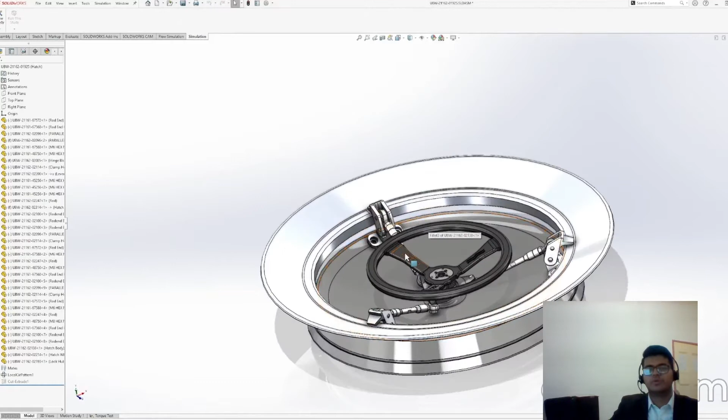Hi and welcome to SolidWorks 2022 simulation. SolidWorks Simulation 2022 adds new capabilities that simplify analysis setup, improve performance and increase the accuracy of your simulation. The internal frame of the Nemo personnel submarine contains a large number of bonded contacts. Solving time for this geometry is now over 25% faster than Simulation 2021.

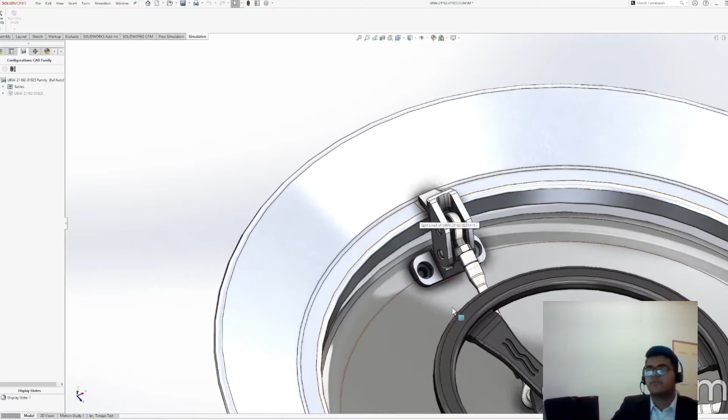The Nemo submarine utilizes a specialized handwheel to secure the hatch while diving. Engaging the latch fingers requires a minimum of 500 Newton of contact force. This would ensure almost any passenger is capable of applying enough torque to properly seal the craft. Taking advantage of cyclic symmetry by cutting the model to 1/3, we will save setup and solve time.

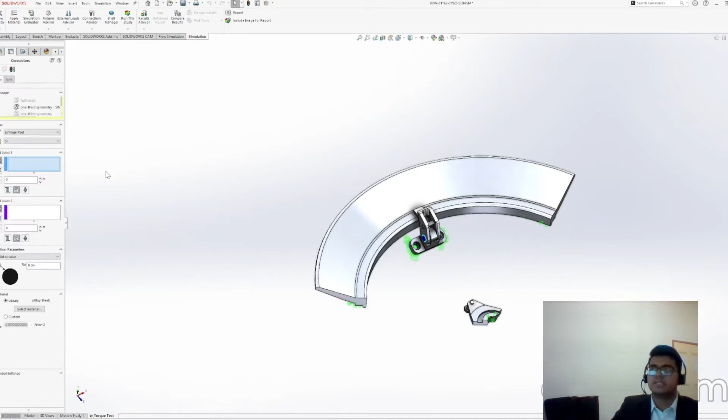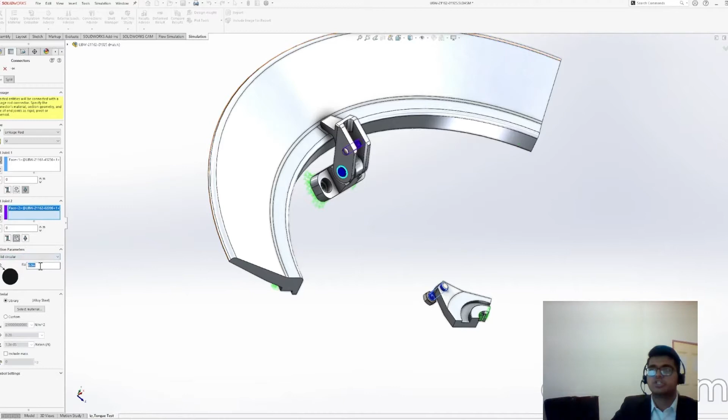The model can further be simplified by removing a tie rod and replacing it with a new type of virtual connector. The linkage rod connector accepts either cylindrical faces or vertices to represent the rod ends. The end condition can be defined as fully rigid, pinned, or even spherical. We will select the cylindrical faces and spherical end conditions to properly simulate the function of the tie rod. We can even choose from several cross-section shapes and define section dimensions.

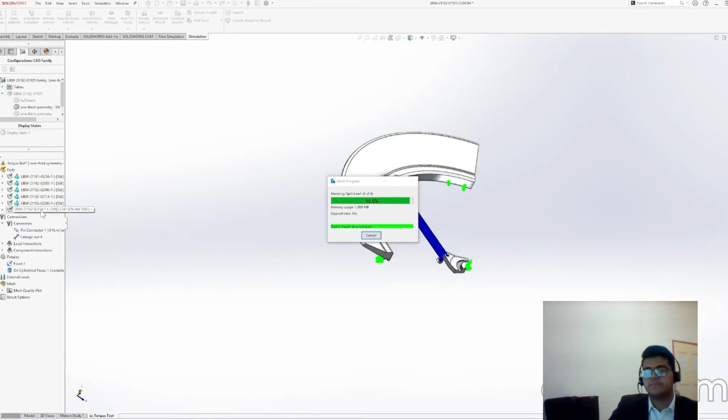SolidWorks 2022 now defaults to the powerful blended curvature-based mesher, which can now accept mesh control values outside of the maximum and minimum global size range. This means you can refine portions of the mesh in any region without limitation, helping you reach the optimum balance of solve time and accuracy. As you can see in the following figure, I have applied mesh control on different regions to optimize the balance of my solving time and make the model more accurate.

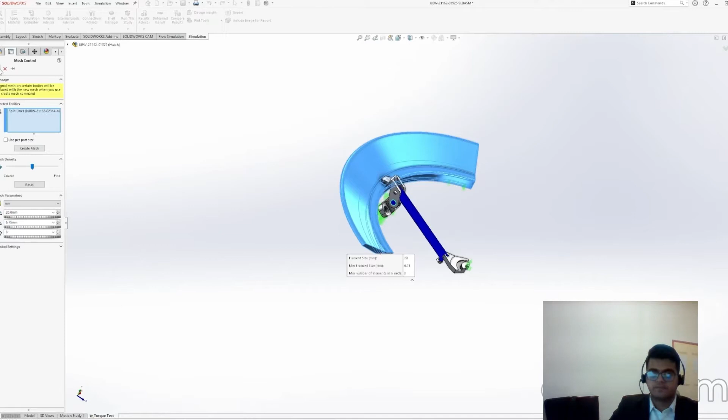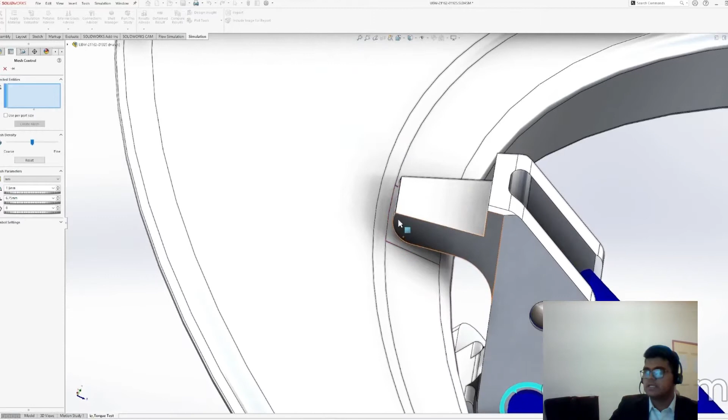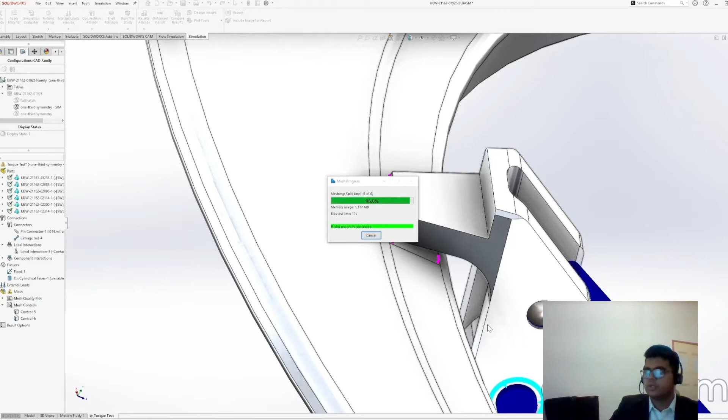Now I'm going to apply the mesh control between the connectors to make it more refined. As you can see, I can simply select the connecting surfaces and apply the mesh control with the element size. Press done, and I'll just go and run the mesh again. Usually remeshing doesn't take long. So just quickly remesh it again, and there you go. You can see the refined meshing between the connected surfaces.

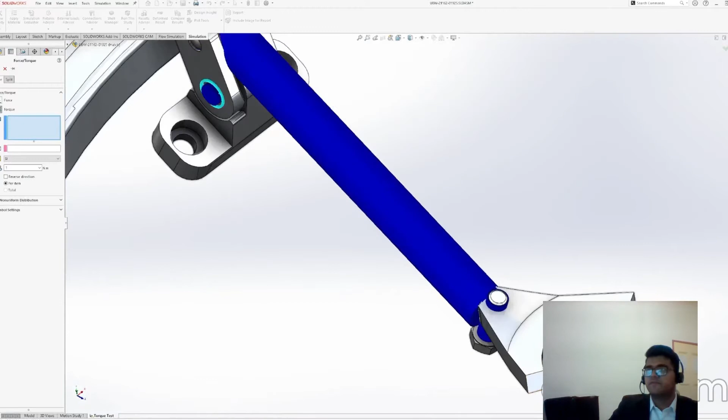Now the next step is we'll apply a torque to the center rotor. The fifth percentile of humans can apply 16.5 Newton meters of torque to a steering wheel of this size. Since we are analyzing a symmetric model, we will cut that value to 1/3.

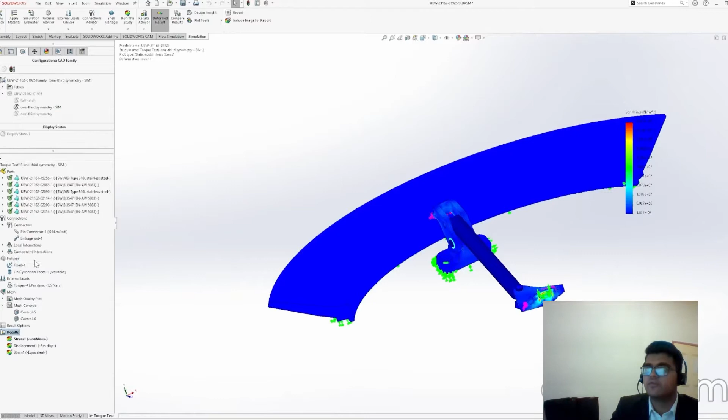After running the analysis, we can review shear, axial and bending loads of the virtual linkage rod, as well as solve for the contact reaction forces developed between the latch finger and hatch flange. To determine the contact forces, I'll quickly go through the results, list result forces, and select the contact friction force between the two contacting surfaces. And then you can find out the resultant force. Multiplying this resultant force by 3 gives less than 500 Newton, which is the requirement for a properly sealed hatch. So the design needs to be changed.

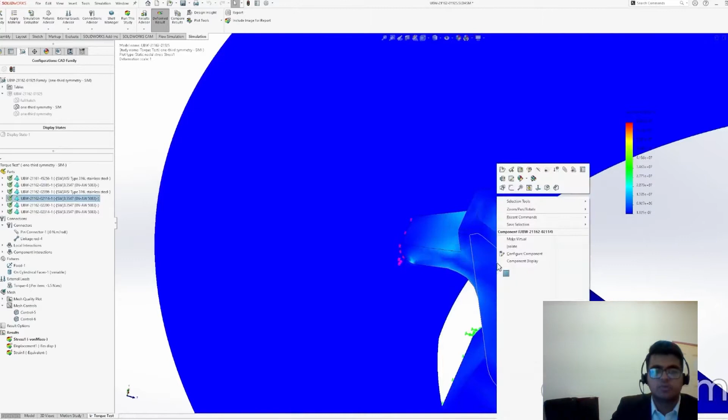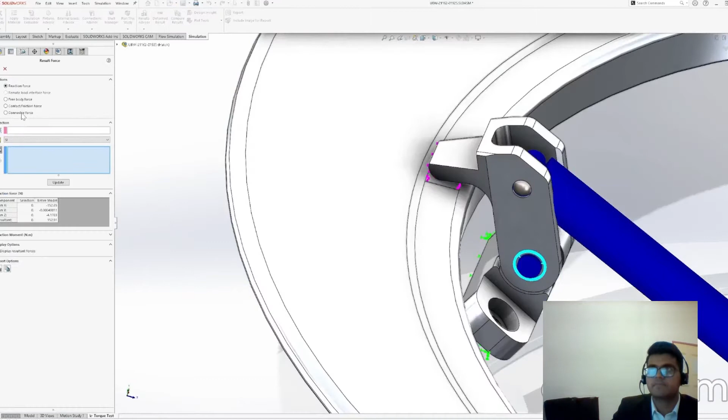Let's try moving the connecting rod attachment 10 mm further away from the pivot. This should add additional contact force without requiring additional torque. So I'll just go again with the results, resultant contact force between the contacting surfaces. Success, 211 Newton. This small change increased the contact force by 38%. We are now safely past the 500 Newton minimum.

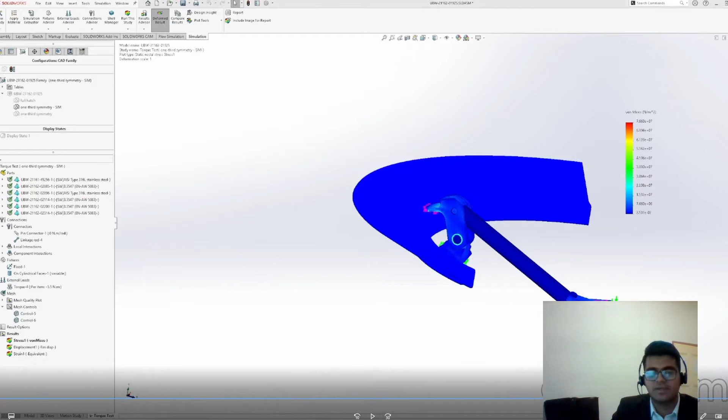SolidWorks 2022 adds new functionality that refines the setup process and provides under-the-hood enhancements that speed up performance and increase solution accuracy.

When collaborating with others while performing design work focused on facilities, often you need to share your design data using an alternative file format like IFC.

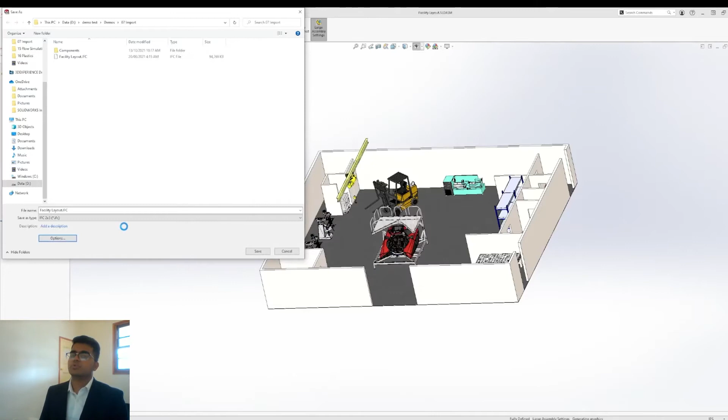SolidWorks 2022 has focused on improving both the efficiency and reliability of saving the IFC file formats out for other design tools to leverage. Additionally, 2022 has improved its flexibility when reading the IFC files as well. Now, when you open an IFC file, you can choose to filter the specific object types to import, avoiding the need to open unnecessary geometry and focus on just the information you need to work with.

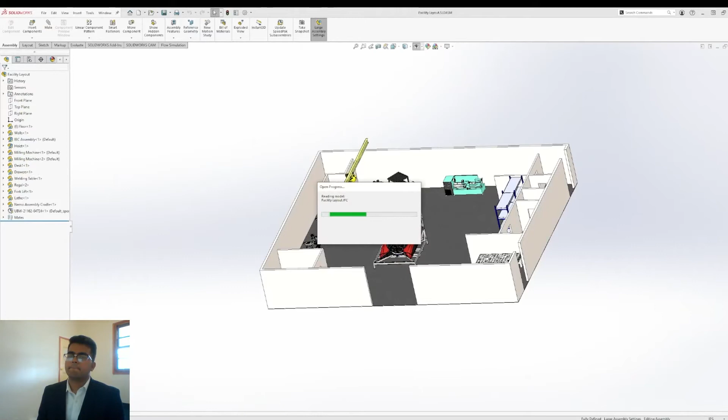For example, your task may only require the walls, floor, and the furniture within the building, as we are selecting in the following video. All of this means the imported files both open faster and do not contain overly complex geometry for the specific design. As you can see in the figure, it's not taking a long processing time to open the IFC files, and it's only showing the specific information which we have chosen.

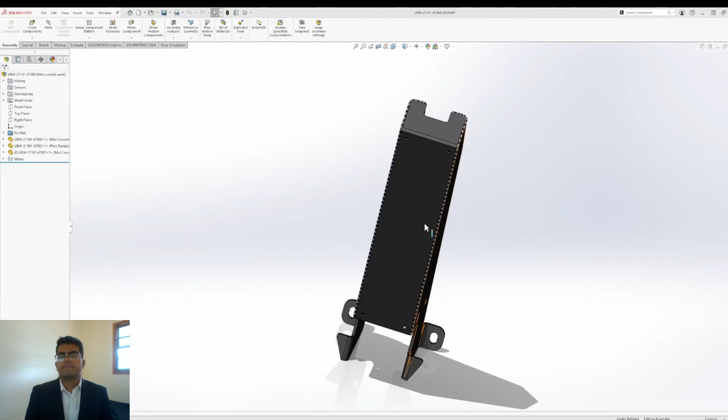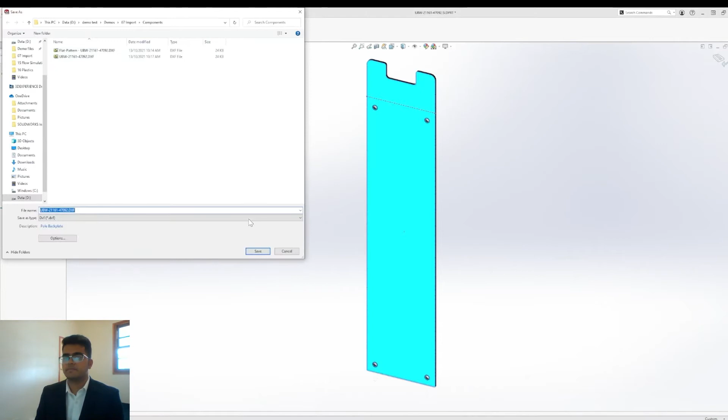Also, the new SolidWorks 2022 has better support for the DXF and DWG file formats from the part file. Components often contain color information that is important for manufacturing processes, such as the color of sketches, bend lines, and other information. Now, when exporting to DXF and DWG from the part file and enabling these objects to be included, their color will be honored in the output files.

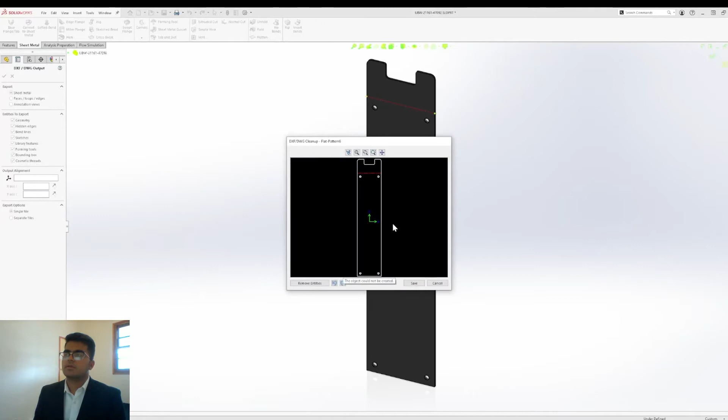This is extremely valuable for downstream operations when color can represent different manufacturing processes or parameters for NC tool equipment. While going through the design process, cosmetics and appearances change regularly. Understanding and updating these changes should happen regardless of when or how we open our files. So let me change the appearance of these components of the demo assembly.

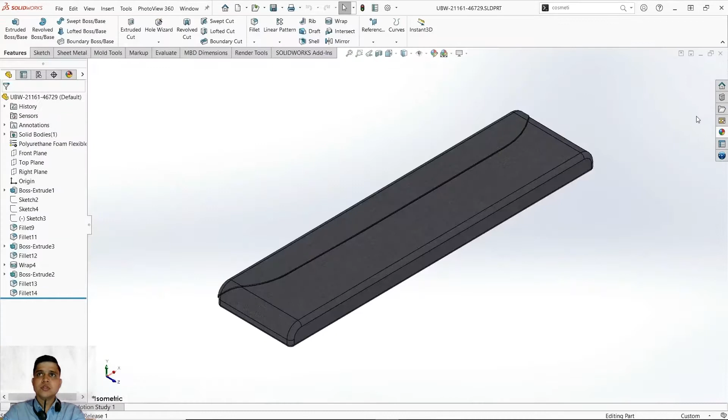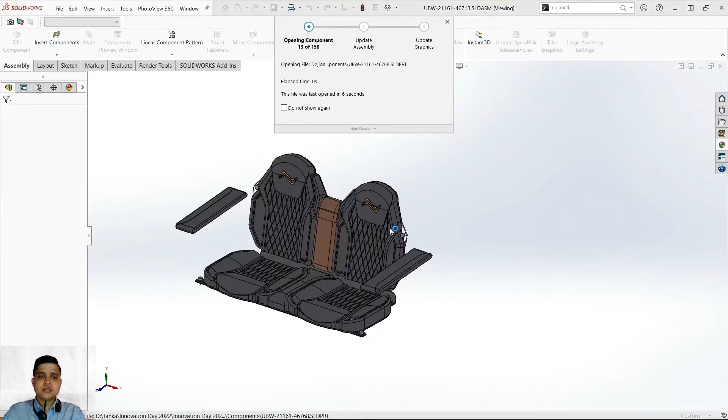Let's do one more. And SolidWorks 2022 ensures that the appearance of components is correct and updated. This is achieved by automatically resolving lightweight components that have a graphical or appearance update, regardless of whether any features have changed since the components were last saved, as you can see on the screen.

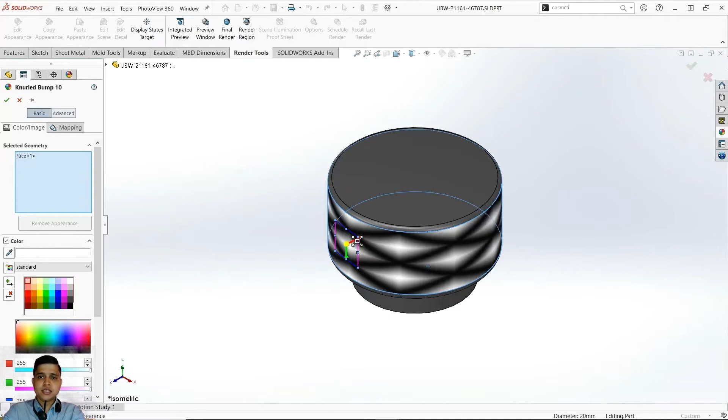The previous version of SolidWorks introduced a unique simplified way to create complex textures by leveraging unique appearances on faces, bodies, or components. Textures can be created on those surfaces to generate complex geometry without any hassle. Now, SolidWorks 2022 delivers increased performance and responsiveness when creating these complex and highly detailed textures. As a result, you can apply them more without sacrificing performance.

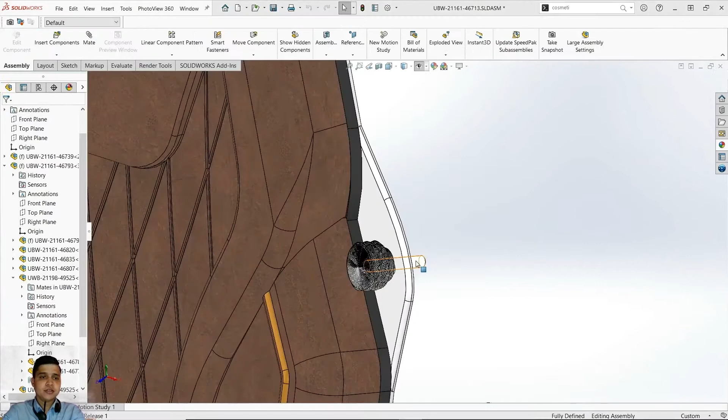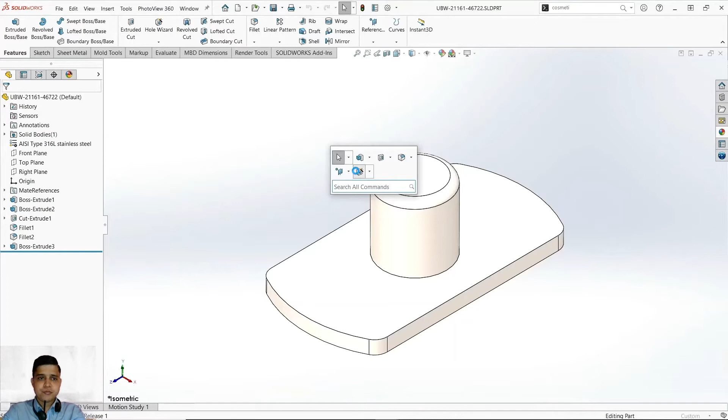SolidWorks 2022 introduced texture-based cosmetic threads. These cosmetic threads not only look great, but also make it easier to spot the components which have threads. These threads will be used for any type of feature that includes cosmetic threads, from manually created threads to the new stud feature, and of course to the Hole Wizard, as you can see on this feature.

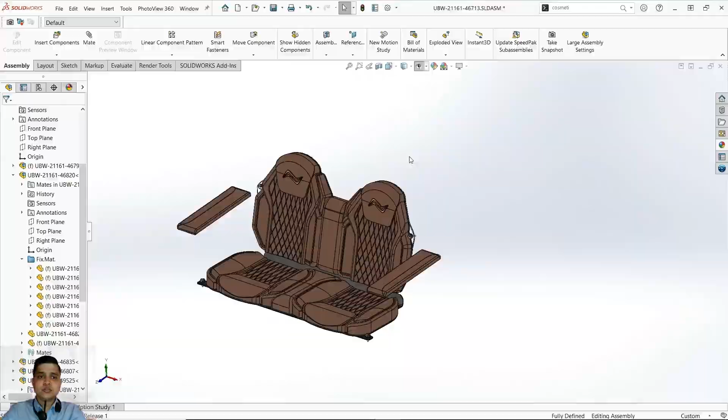Finally, performance is always critical to saving us time. Let me unhide this, and yes, performance is always critical to saving us time. SolidWorks 2022 has increased the frame rate when rotating parts and assemblies with silhouette edges by over 10%, saving you time on every single zoom, pan, and rotate.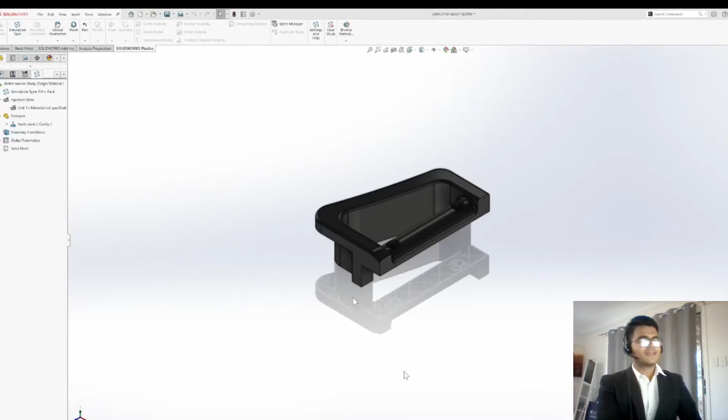Welcome to the new SolidWorks Plastics. SolidWorks Plastics 2022 adds new features and horsepower to solve more complex problems with greater ease. This plastic cover is bolted to two hoist hooks on either side of the hatch. Since it has an asymmetric design, both the right and left-handed versions are required for the Nemo submarine. We'll start by adding a material to the plastic injection analysis.

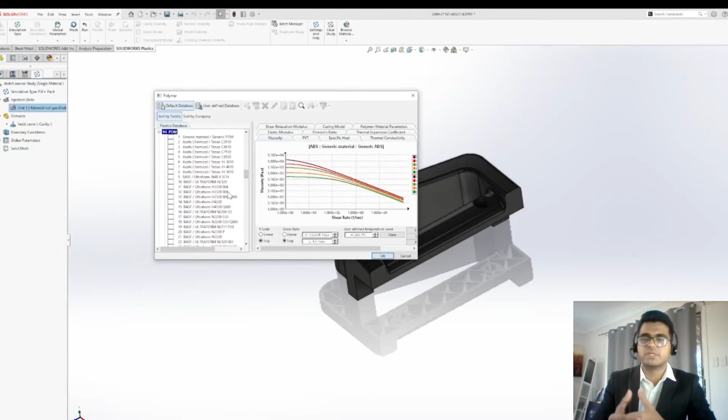The material database is the key to any plastic simulation, and this year we have added 100 new material models and updated over 1500 materials to improve the fill, pack and warp accuracy. For this part, we'll choose a Delrin material. The new injection location advisor gives us immediate feedback on where to place the injection point. It even automatically solves for the optimum pull direction based on your geometry.

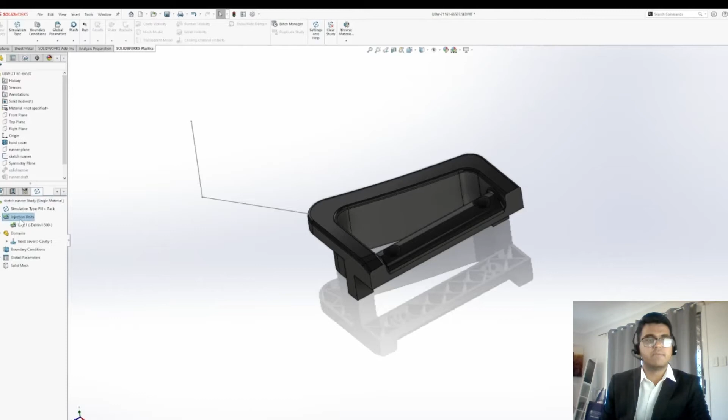But for this model, we have decided to go with a sketch-based runner using the updated simplified runner tool. Just click the sketch segment and choose the dimension. The new flip dimension button makes it even easier to build your custom runner, and now there is no need to define the number of elements for each segment. It's computed automatically. As you can see in the following figure, I'm just adding the dimensions for the runner system, and with that flip button I can just interchange it.

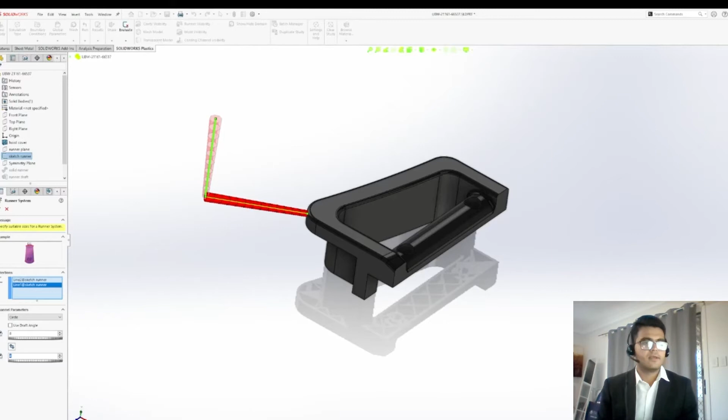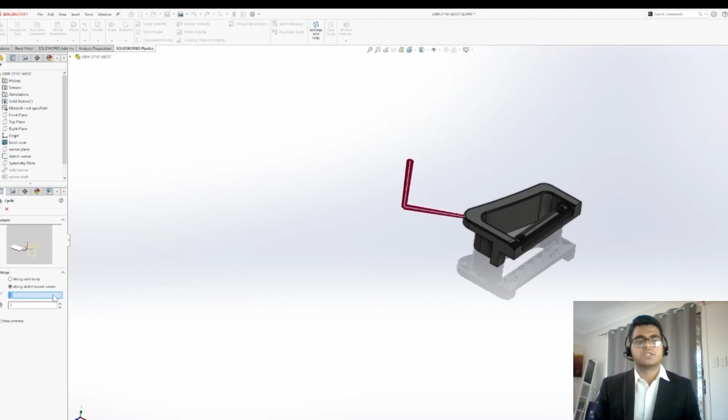Perfect. We need a family mold to create cavities for both the right and left-handed components. In Plastics 2022, we can use the new symmetry boundary conditions. This will create a virtual opposite-handed cavity in one step. Simply click on a plane that cuts through the sprue, and the new cavity associated with the runner will be there. But what if you need a family mold with multiple cavities for the same part?

The new cyclic boundary condition allows you to create additional virtual cavities in a circular pattern. Just click the center, the sprue sketch line, and the number of cavities you want, and you're done.

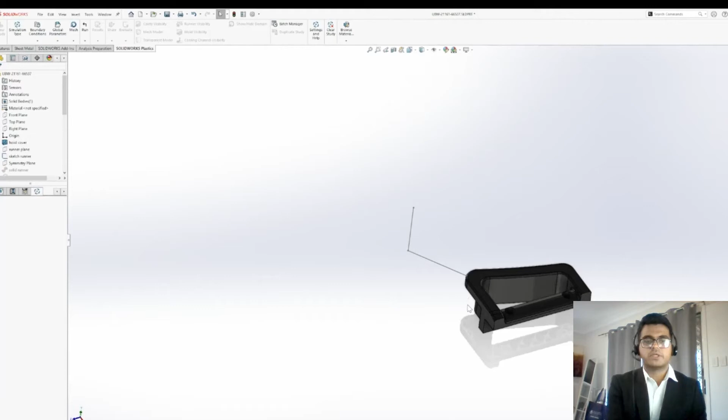And of course, if you choose to model your runner system using the solid geometry, both the symmetry and the cyclic boundary condition can also be used. When it comes time to solve the analysis, the new run button is only a right click away from the top of the tree.

And when analyzing your fill, pack, cool, warp studies, turning on the symmetry option allows you to visualize the full virtual cavity.

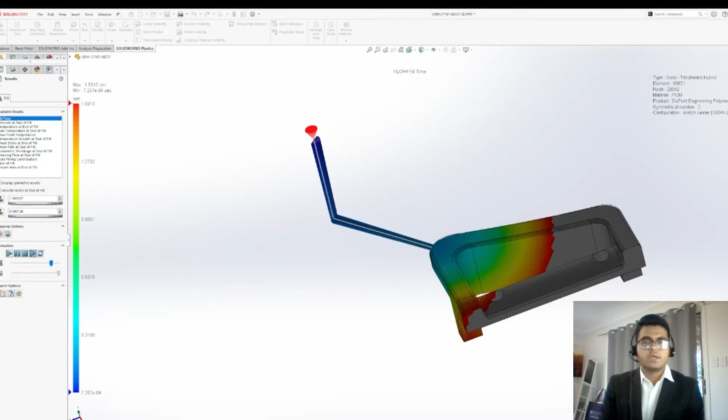Actually, my CPU is crunching some time because there are few applications running in the background.

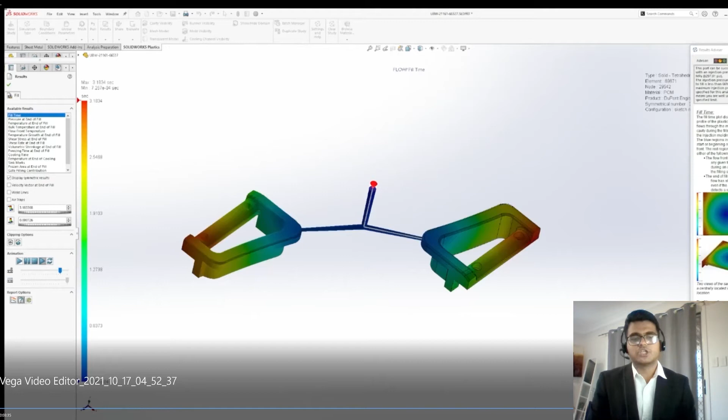Okay, so SolidWorks Plastics 2022 combines additional functionality, simpler pre-processing, and powerful automation to get accurate plastic injection simulation results faster.

Whether we are working with in-house or clients manufacturing, quality assurance is key to ensuring consistency with our products. Let's see how SolidWorks Inspection 2022 simplifies and automates QA operations. The major change in SolidWorks Inspection 2022 is it supports NX files and the much anticipated SolidWorks drawing file format as highlighted in the video just before.

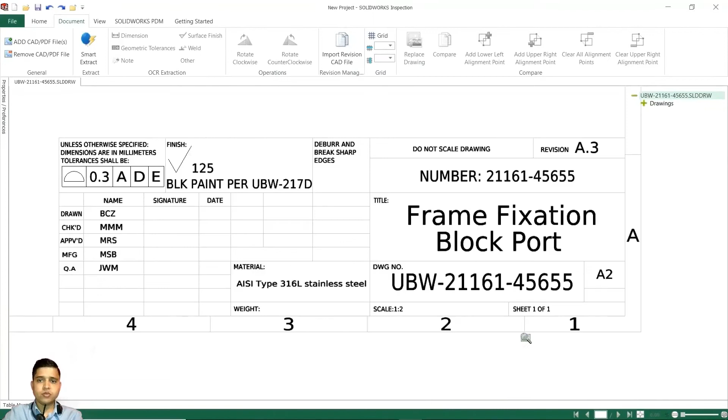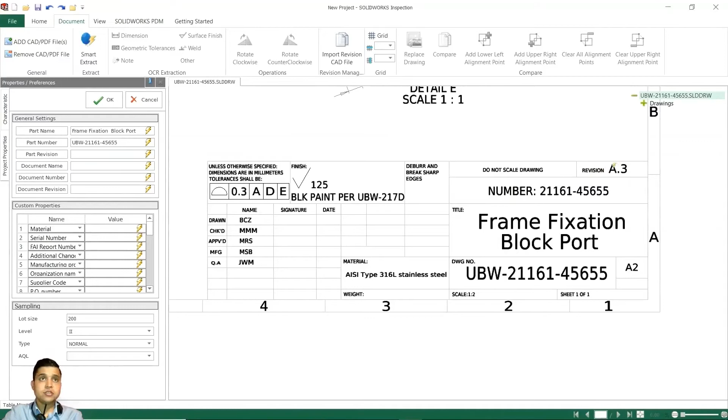Now we can start the project with the standalone application where we can directly import the SolidWorks drawing, then extraction of required part information such as description, part number, and revision is simply a click. The same smart extraction method is used to collect dimensional and tolerance characteristics as required for the report.

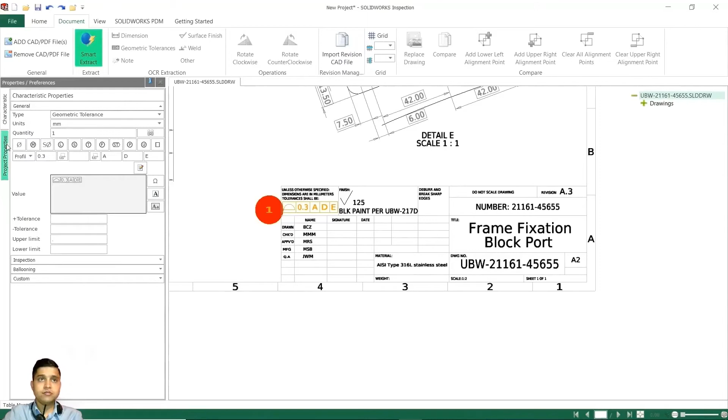An additional surface profile tolerance note is ballooned and extracted. You will see SolidWorks identifies GD&T symbol precision and geometric tolerance indicators, which will all be carried downstream into your first article or in-process reports. Continuing through the extraction process, hole callouts and geometric tolerances are ballooned and remapped to the project's bill of characteristics.

Investigating balloon 5, which is home to multiple dimensional requirements, SolidWorks Inspection automatically identifies each and has broken them into two sub-balloons, 5.1 and 5.2, as shown in the table. Repeating these simple steps for the required tolerances and dimensional callouts is a breeze. No manual data entry required.

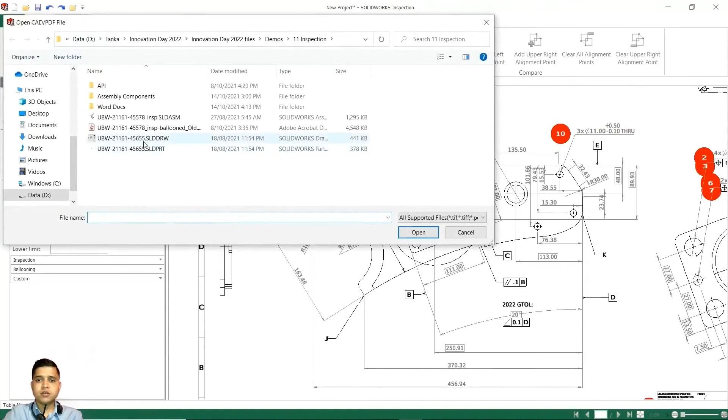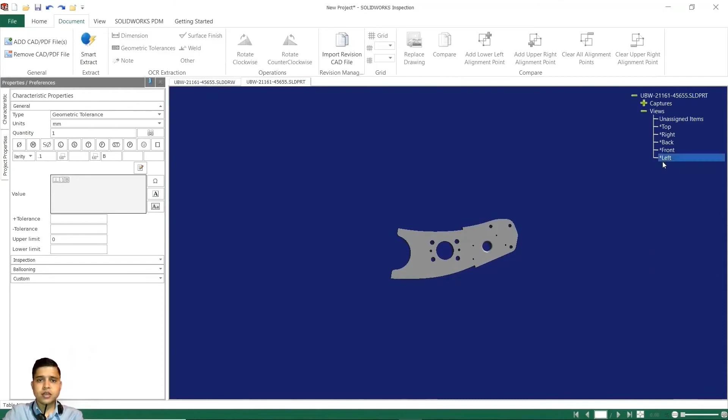Let's say, what if we want to use a 3D part? SolidWorks Inspection 2022 has dramatically upgraded the support for SolidWorks part files. So let me add the 3D part directly into the inspection project alongside the current 2D sheet. So this is our 2D sheet and this is our current 3D part file. The extraction process of geometric tolerances and positional information is the same as in the 2D drawing, but now ballooned under 3D parts. As you can see, I will be ballooning those 4 bits.

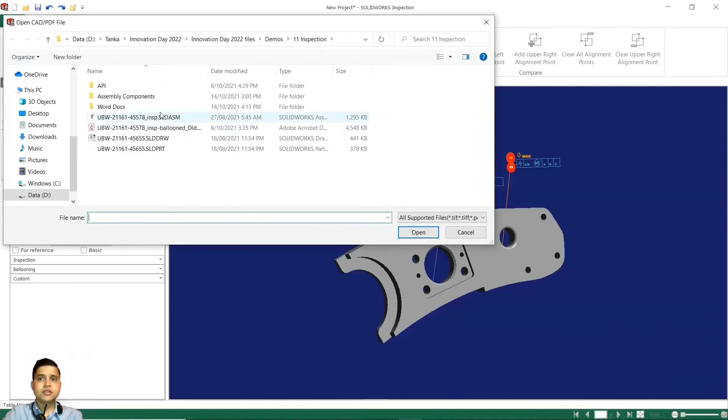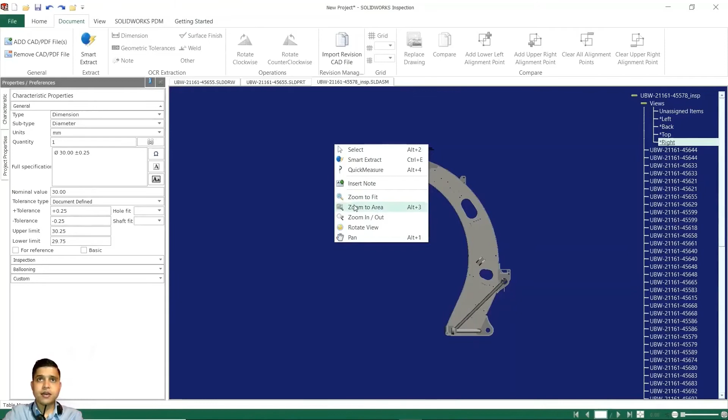During the assembly of this bracket, a few critical welds along with some surface finish requirements are also required to be inspected. Inspection 2022 now fully supports importing SolidWorks assemblies to ensure proper fit, form and function with all manufactured and assembled items. With the bill of characteristics created, this package can now be saved. Let me extract those 3 tolerances and geometrical data.

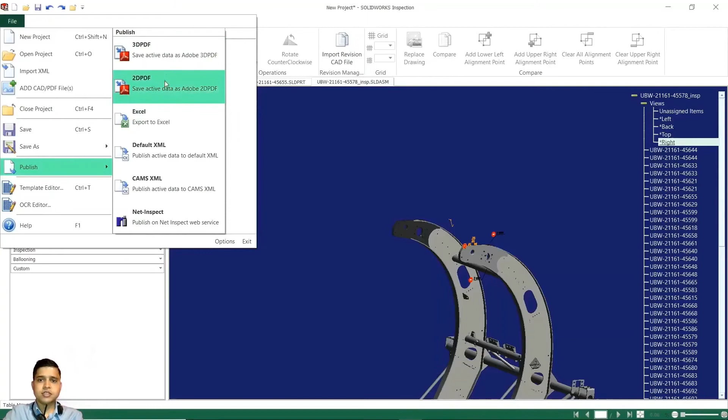So now it can be saved or published with all the associative 2D and 3D data without having to access any of the drawings, parts or assemblies inside of SolidWorks CAD. The inspection report can be generated and include both 2D and 3D PDFs along with the necessary Excel documentation. And that Excel documentation, as you can see it.

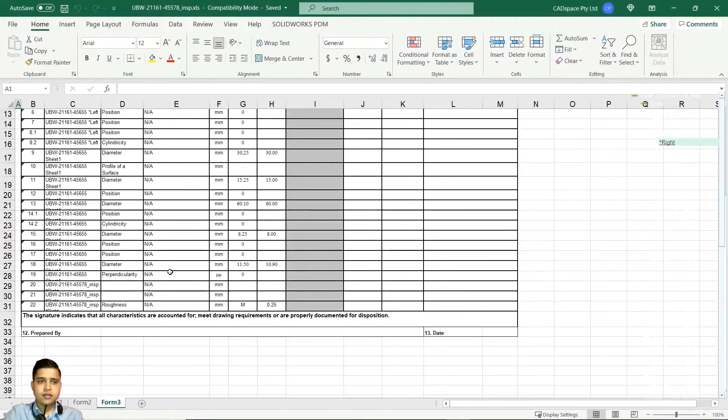SolidWorks Inspection is also available directly inside SolidWorks itself as an add-in. New in Inspection 2022 is full support for API, which can be found in What's New SolidWorks 2022.

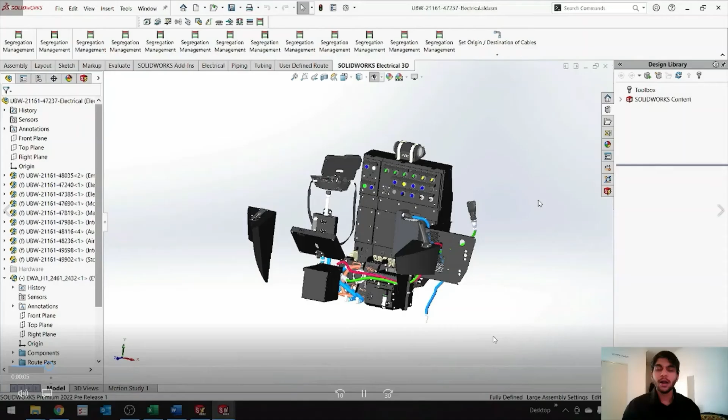In any mechatronic system, electrical design plays a very important role. And in SolidWorks, we have brought multidisciplinary engineering under one ecosystem. Creating electrical information in SolidWorks is no longer a lengthy process. Adding connection points has become much easier. Let's go to Tools, SolidWorks Electrical, and we can see all the different C point options.

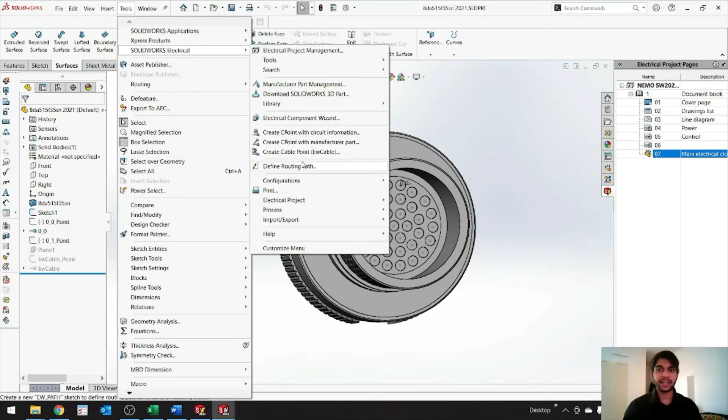Let's create a CPoint from manufacturer part. In the dialog box, we can browse for different manufacturer parts. Let's select this one. As we can see, SolidWorks has created a table which shows the circuits that can be associated or the C points that can be created. A simple selection of sketch point or edge will create multiple C points at a time. As we can see, SolidWorks is creating multiple C points for the selections that we have made one by one.

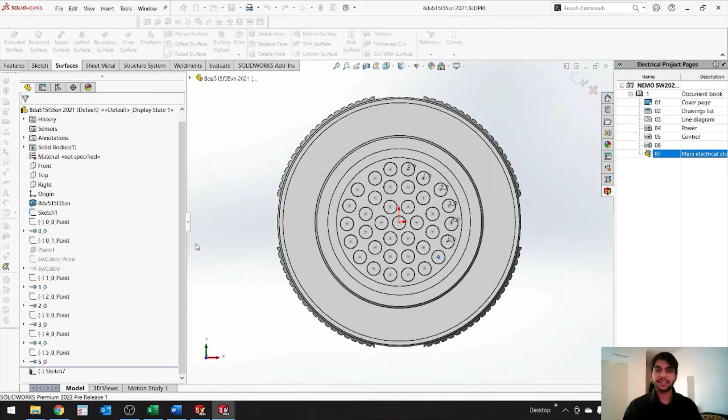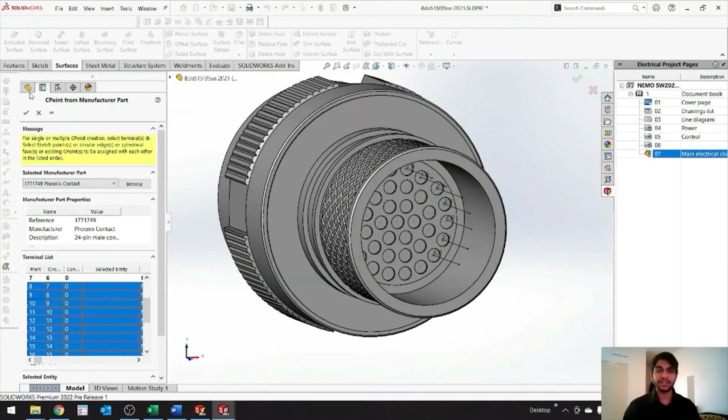We don't have to go to the SolidWorks Electrical library wizard anymore to create electrical information for a component or to create C points. As we can see on the screen, all the selection points have successfully created C points. Let's go to SolidWorks Electrical and create C points from manufacturer part again. As we can see, the previous manufacturer part is already selected, and for the terminals that haven't been associated with a C point, we can update those and add multiple C points further to it.

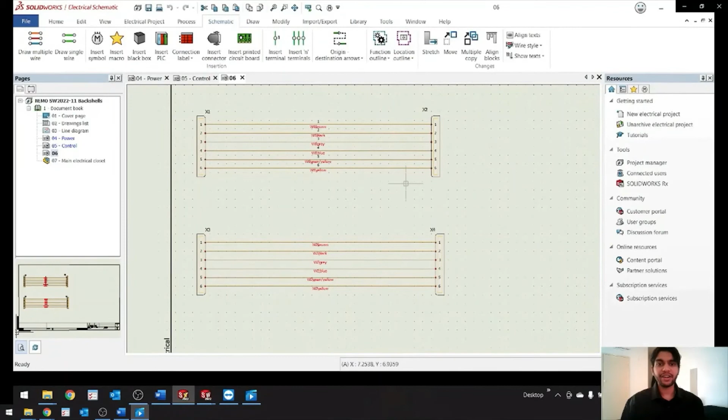How would you protect the junction between contacts and wires to eliminate electrical failures? Backshells are used and SolidWorks now supports them. Two harnesses from the battery to the control panel and external plug are created in SolidWorks Electrical Schematics. In SolidWorks, these two harnesses are routed.

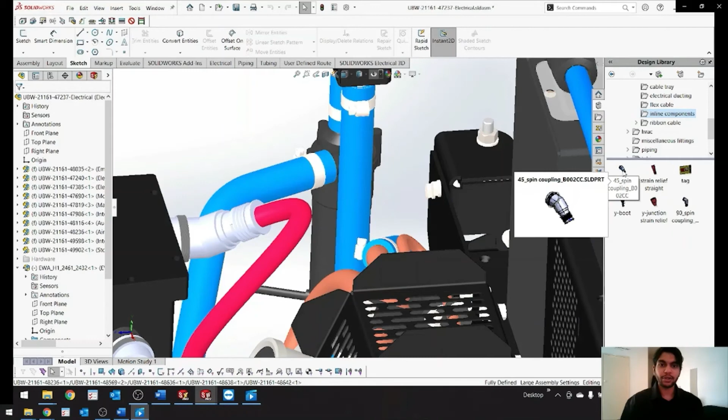Now that the routes are in place, you can address the wire and the contacts problem. Adding backshells to the connectors removes the stress between contacts and wires. Backshells are available in Design Library, Routing, Electrical, Inline Component. A 45-degree spin coupling was used and mated to the connector.

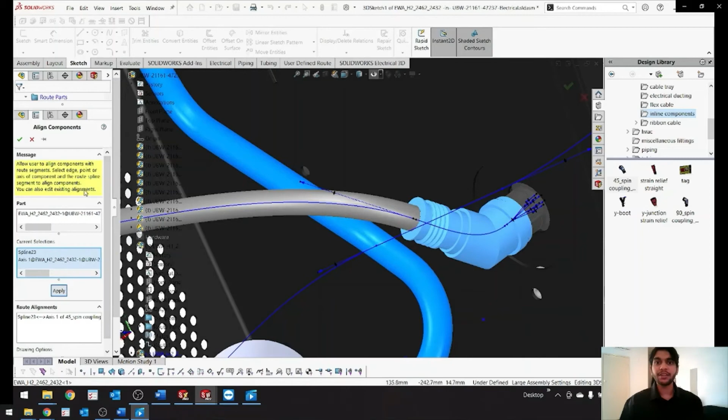One more connector with a backshell will need adjustment of the harness to go through the backshell. Right-click and choose Edit Route for the harness that is in red. Select the body of the backshell, right-click and choose Align Components. Select the spline of the harness and then the axis of the backshell. The harness adjusts and goes through the backshell.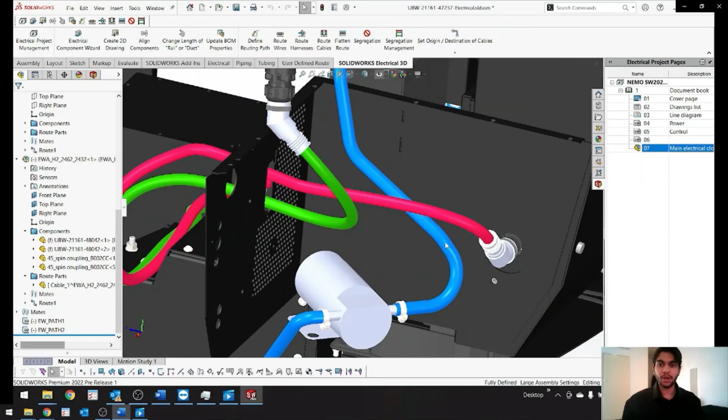Efficient use of backshells during design will protect the junction between contacts and wires, eliminating downstream manufacturing delays and costly redesigns. Creating harness drawings and tables manually takes time and can be error-prone. Flatten Route in SolidWorks automates this process and now supports backshells.

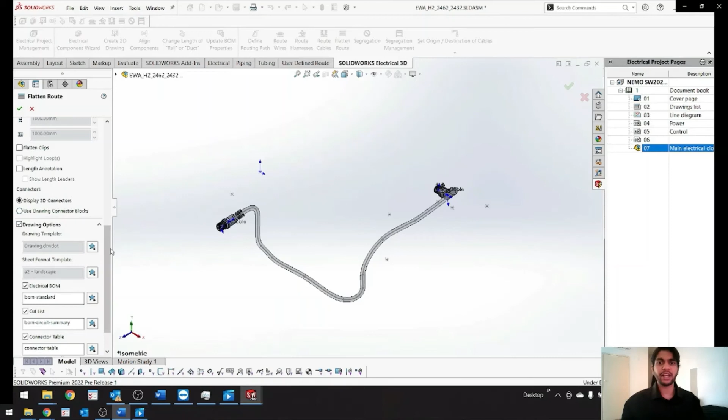Flattening this red harness will include backshells along with the harness and connectors in its 3D position and will show them in appropriate locations. In the Flatten Route dialog box, choose what details of documentation you will need to include, like manufacture, display 3D connectors, and check mark for drawing options. Choosing OK produces the harness drawing with connectors, backshells, tables, and callouts automatically and saves time for engineers to tackle other technical challenges.

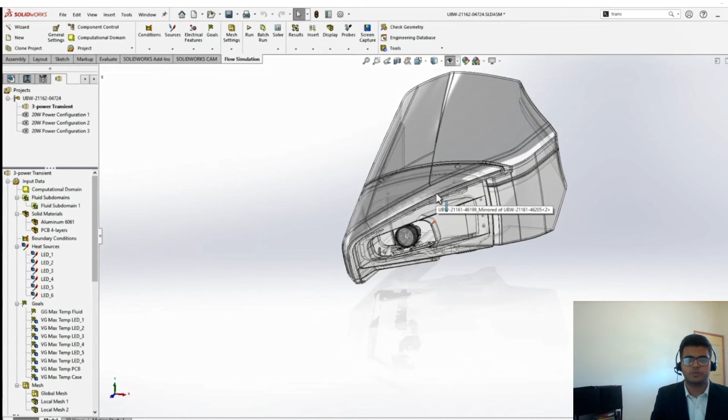SolidWorks Flow Simulation 2022 offers some exciting new plots and the ability to analyze results across different projects. We are currently testing a new high-powered LED lamp for the Nemo submersible. This new lamp can run at 3 different brightness levels, giving a user more options for different underwater environments. There is also a mixed power setting that will allow each of these 3 pairs of LEDs to run at either 2, 3 or 4 watts.

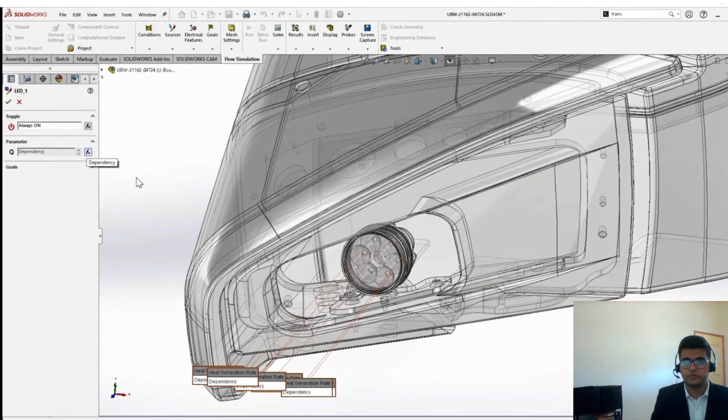Our mission is to determine which configuration will operate at the lowest overall temperature. Running a transient analysis while switching the lamp through the different power settings will give us valuable information about how the lamp will cool down and heat up in the external water temperature. The Transient Explorer is a powerful tool that allows us to visualize the results through a transient analysis.

SolidWorks Flow Simulation 2022 can now display the flux plot in Transient Explorer, allowing us to get in-depth numerical results on how power is moving through the complex system. As you can see in the following figure, the green arrow describes how the flux is moving through the system.

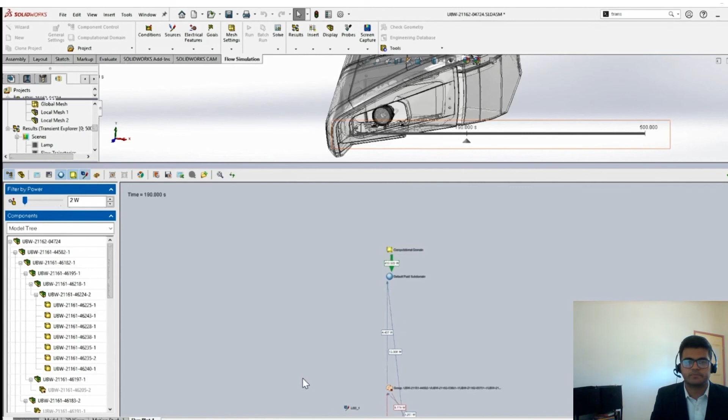Now we can also create a new equation goal after running the analysis that can process values of other calculated goals. Let us create a quick equation goal that will compute the maximum temperature of all the LED lamps over the entire transient analysis.

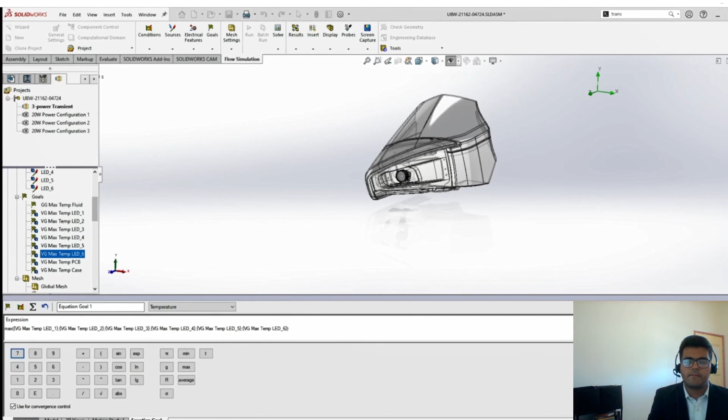We have also run several steady-state studies in a new experimental power mode. As you can see, the equation goal I have already created, and from there we can just see the history graph which shows the transient analysis over there.

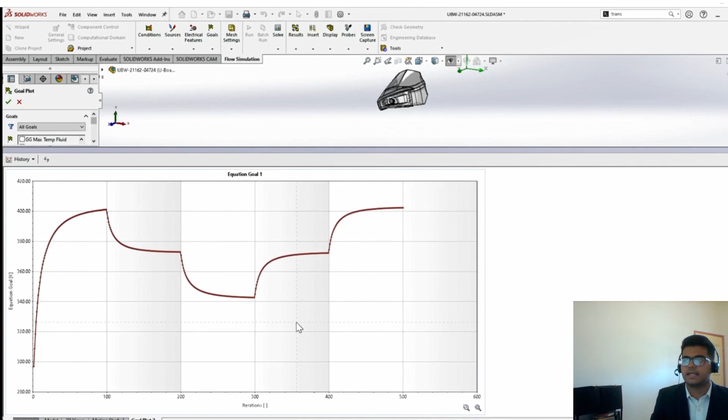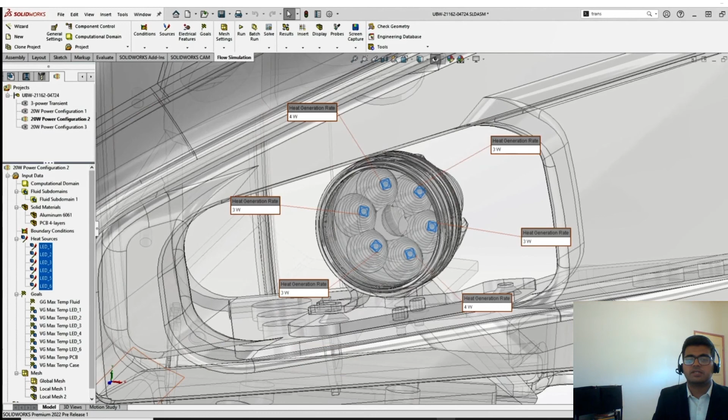Now we have run several steady-state studies in a new experimental power mode where each LED lamp can be set to a different power setting. These experiments can determine if there are optimal configurations that maximize brightness and minimize the heat at the circuit board.

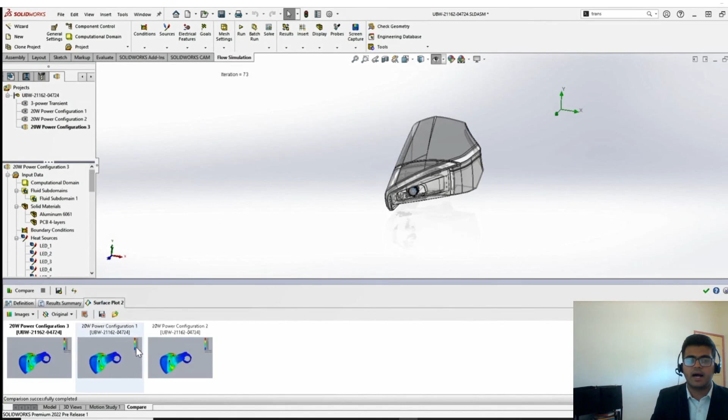Comparing the results between the projects is necessary to understand similarities and differences, but simply putting 2 plots side by side is not always helpful. A new merge option allows us to collect multiple results and highlight the overall maximum and minimum values between the projects in one combined plot.

A new difference plot allows us to create a plot that displays the difference from one project to a different project. This new compare plot option will help us to gain a ton of insight into the effect of experimental power modes.

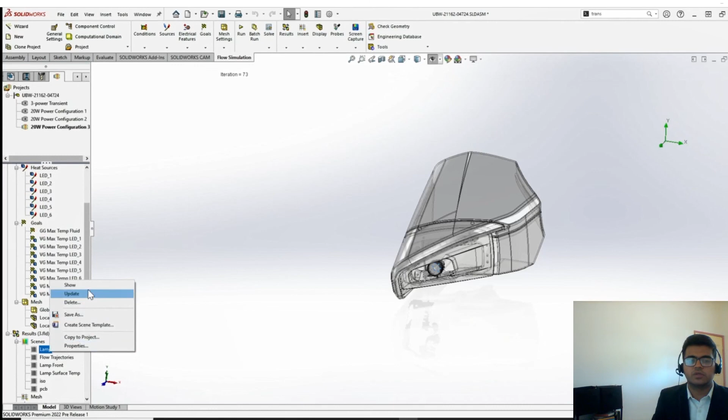The scene plot has also been updated to store model orientation, zoom and part visibility, so creating that perfect scene will also retain the display settings to view it perfectly every time.

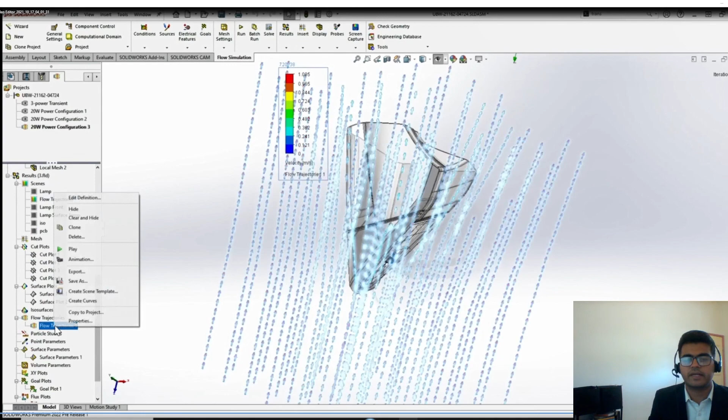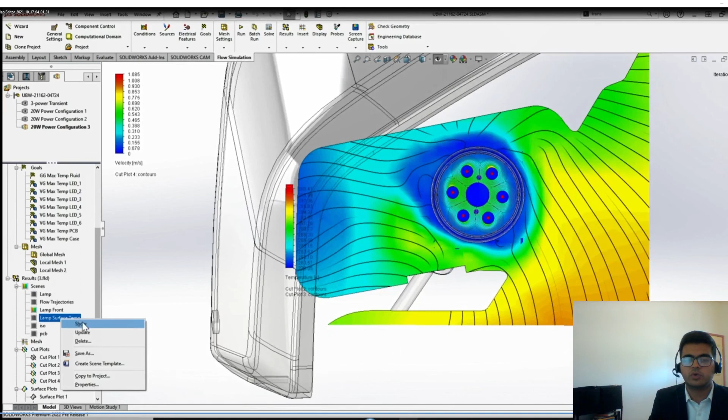Regardless of your current view state, we may want to add some probes to the scene to highlight locations of interest. Now when we copy the scene plot from one project to another, the probes are copied as well. SolidWorks Flow Simulation 2022 keeps you in control of results by providing powerful new plots and expanding the flexibility to review shared results for multiple projects.